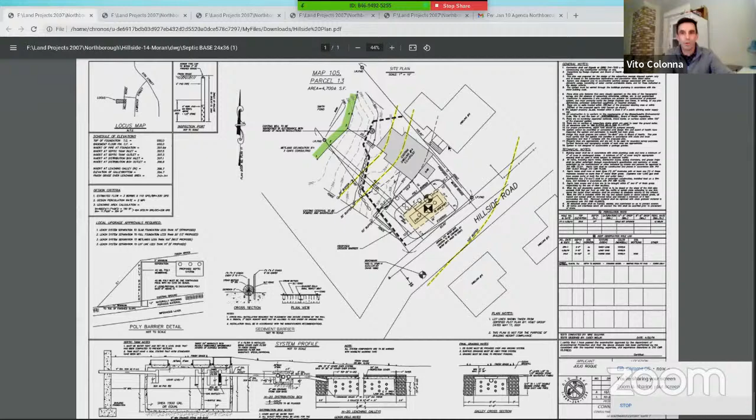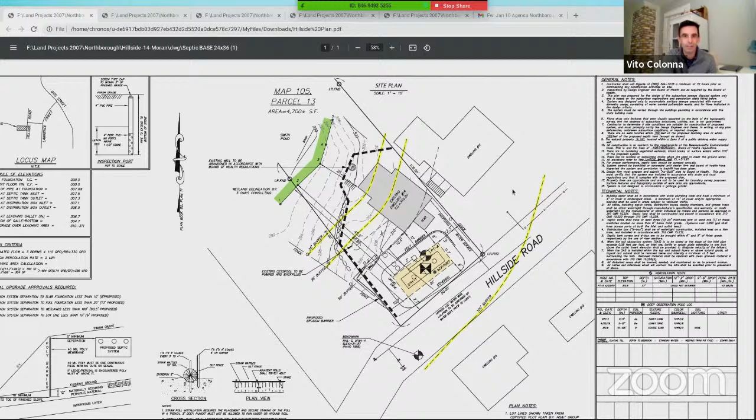So we're over at 14 Hillside. It's a pretty small piece of property, 4,700 square feet, and it's right on Smith Pond to the rear. So right now there's an existing house kind of in the middle, Smith Pond to the rear, and then the 100-foot buffer zone is all the way out to Hillside. So the entire site's inside the buffer zone. It is a challenging site with the slope coming down the back.

So there were a couple components to this one. The first one was they want to replace the septic system. Right now there's an existing cesspool located off to the side of the house, and that's in failure, so it has to be replaced. We proposed to put a septic right up in the front, just about as far as we could get it away from the wetland. It's about 60 feet from the edge of wetlands, but it is basically as far as we could push that away. So it is an improvement, providing more separation from both groundwater and horizontally to the wetlands.

And then along with that, they also have a new water service coming in on the side, pushed to the side to avoid the septic system. And then also looking to abandon the well out in the back over there. Another part of the project that came in after we filed - we amended the plans to show this - but the owner had a structural consultant look at the foundation, and there are repairs and replacement of the foundation that's needed. So we pulled the erosion barrier out and around to give as much space as we can. It is difficult access back here, but they do need to do foundation work on that.

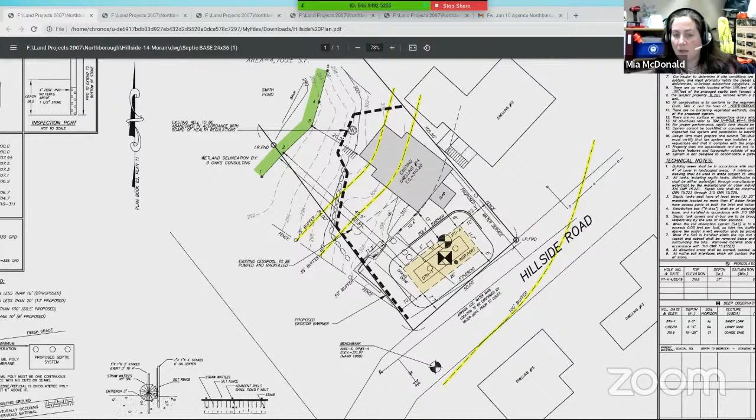And just to note in the minutes, and I don't think it's redundant to put a special condition in, that this really doesn't include any landscaping. The backyard's a bit wild, and it wasn't this owner, it was a previous owner, was back there cutting vegetation, and I called and had to ask them to stop. They said they were cleaning it, and I said you can't just cut trees down there without a permit. So just to really note for the record that the erosion control line is the limit of work, and any work beyond that would need a new notice of intent, because the area has renaturalized fully.

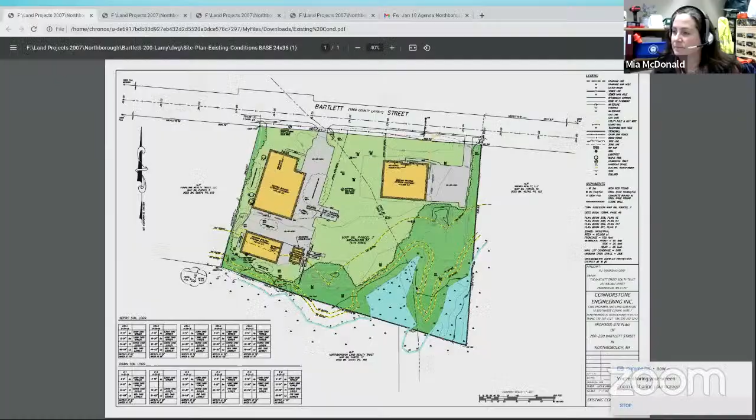So we are at 200 Bartlett Street. It's a 6.7 acre parcel, currently developed with basically 3 primary buildings and then there's 2 outbuildings - these 3 shown here, and there's a building right here, it's a garage, and then another garage down here. This building in the rear is Lamy's Automotive, you're probably familiar with that. And then these front two buildings are currently unoccupied.

Out in the rear, there are some bordering vegetated wetlands going along - there's this blue line in the back. They extend up into the site and then cover the corner over in here. And the 100-foot buffer zone, this yellow line, extends up into the rear portion of the site.

Overall the site's fairly developed, it's been worked over the years. Even this area in the back, it's more of a field with some overgrown scrub, but you can tell it's been developed - there's some spoil piles in the back here, there's been excavation in the past all out in here. The only areas that really haven't been touched are basically right up tight to the wetlands. The rest of the areas over time has been developed and worked over the years.

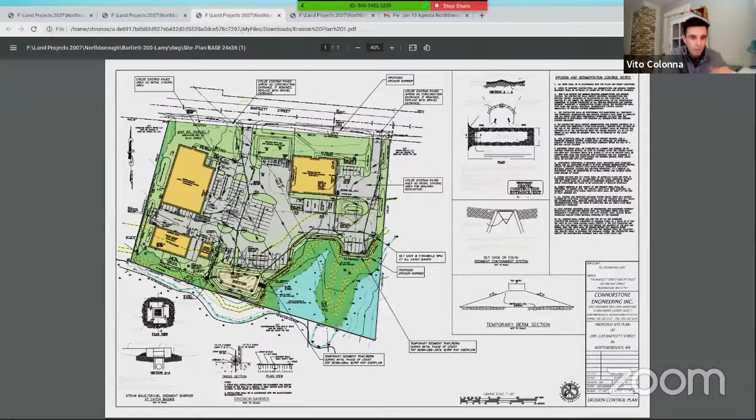During construction, we have an erosion control plan. It may be a little difficult to tell with the colors here, but essentially what we're doing is providing a berm to create a temporary basin around the back there, and another one around here. Early on in construction, we'd put in the erosion controls around the edge, and then construct this small berm to contain everything from the work area on site. It's a fairly simple system, but it would be effective and contain everything on site without letting it get to the wetlands during construction.

All right, I think that was my brief overview. I know Mia did have some comments, and we submitted updated plans. I don't know if you've had a chance to look at them yet, but we addressed Mia's comments. I don't know if there's any particular ones you want to go through, but we provided also the LSP report on the previous contamination and ongoing monitoring that's out there. I can let Paula go through that ongoing monitoring that's part of the site right now.

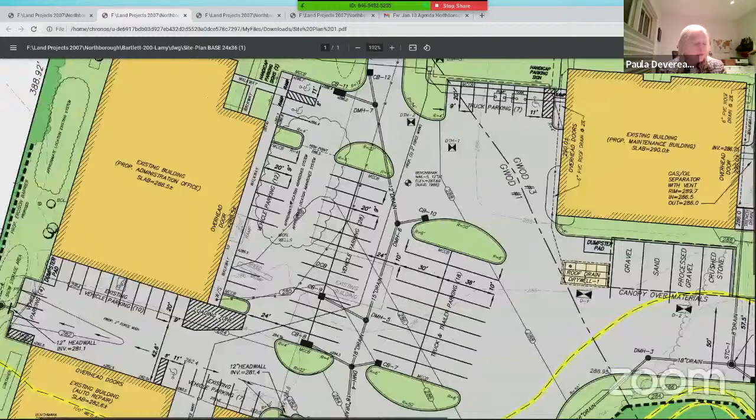Sure. So as Vito indicated, there was an area that had some contamination because a circuit manufacturing company was located here in the late 1980s. There were some volatile chemicals that were detected in a leaching field. The owner had some work done from September 2002 through 2009 to treat the contaminants. The problem is that this is in a groundwater protection area.

As an aside, I want to let you know that we did go to the Zoning Board of Appeals for the maintenance facility in the building as you're looking at it right now to the right.

But anyway, to get back to the contamination, because it was in a groundwater area, the seller and the LSP for the seller were told by DEP that because the Lyman Street well, the water well, had been discontinued, and because this was an industrial area, it didn't have to be cleaned up to drinking water standards. That has since been proven not to be true. DEP does, because it's in a groundwater protection area under local zoning, now require that even if a well isn't being utilized, the property be cleaned up to drinking water standards.

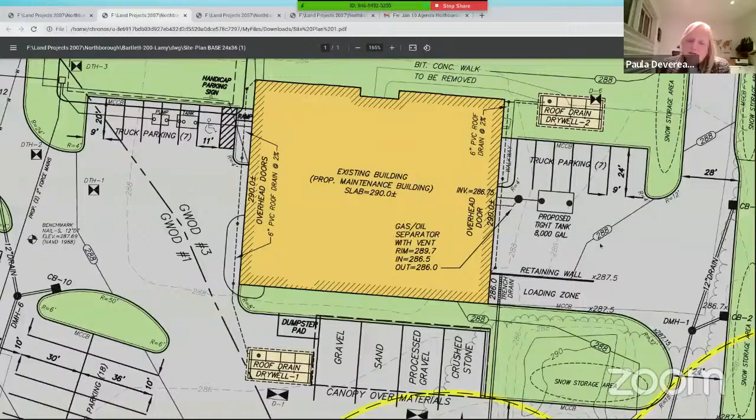You've got ZBA approval. You're just waiting to get in front of the planning board. Correct.

One question I have: most of this is outside of the well, and certainly there's not a lot inside the buffer zone, but the equipment parking on the right-hand side, and the parking on the left-hand side which has a Stormceptor — do we have any exposure there? We're close to the wetlands, right? What about potential leakage, dripping oil or brake fluid or something from vehicles parked there?

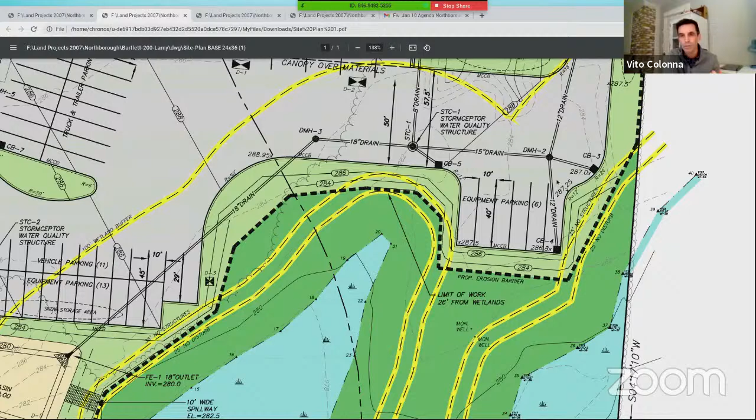Yeah, so that was one of the reasons we use the Stormceptors — they separate out the oils and floatables better than some of the other structural treatment systems. So everything from this area would have curbing around the edges, and everything would get into these deep sump catch basins, which also have hoods on them. Then it would go through the Stormceptor. Okay, good.

So we have one on that system, and then one over here too, and one over here. We also have two more, one on each side of the Lamy Automotive building — there's one over here and one over here. Okay.

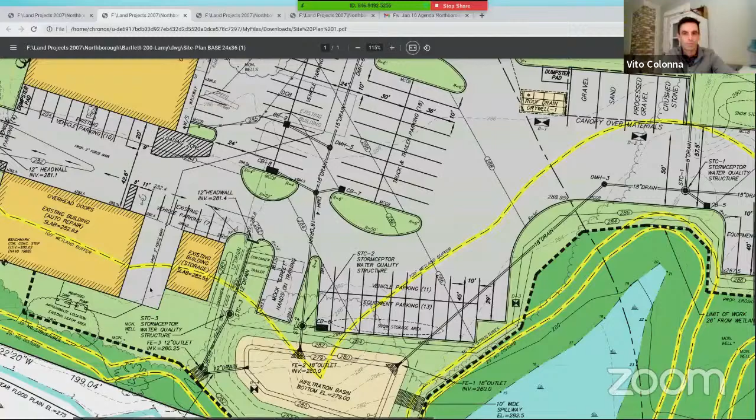Any questions from the commission? Comments, concerns?

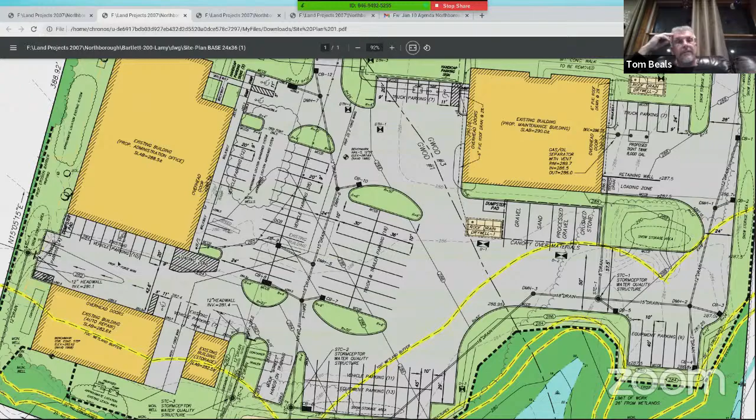I just have a quick comment regarding the roof drains on those two buildings where you have pre-existing groundwater contamination. You really don't want to put an additional water source in there, because that's going to make it migrate further away. So you might need a reinjection gallery outside of the contamination zone for those roof drains. That's why I didn't want to just jump on it and add that in right away — I want to check with the LSP to see where they'd recommend it, and what type of device they'd like to see. It might be something small that lets a little bit in, or if we do full infiltration, it gets pushed up to the front or something like that.

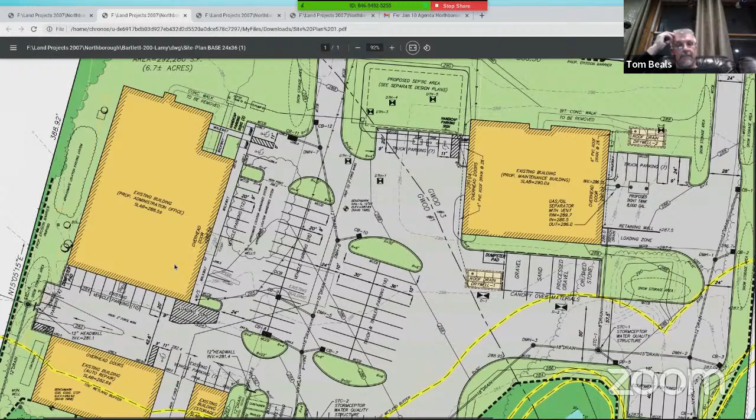I'd like to take a deeper look at it before we just put something there. Groundwater flow is most likely to the wetlands, so go with the direction of the LSP. Sometimes you want to put it either downgradient or upgradient, depending what they want to do. We'll have to discuss with them and see what they recommend. Overall, everything else I'm happy with.

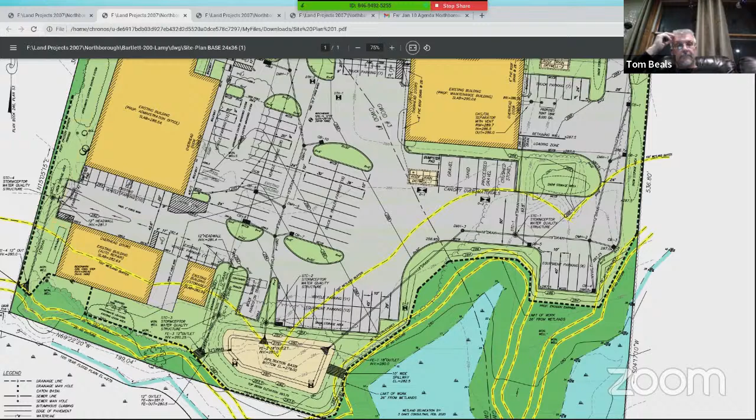Any more questions or comments from the commission? It sounds like we're going to continue this because of the roof drainage open item.

It's definitely an overall improvement to existing conditions. It would be nice to see recharge of the roof, because in the area between Lamy and the administration building we want to reduce flooding there. There is flooding there right now, so it would be nice to not have flooding, especially now that we know the contamination is ongoing. You could continue it until you get more information. The contamination area is really outside of our scope, right? That's between DEP and the applicant. Different department, yep.

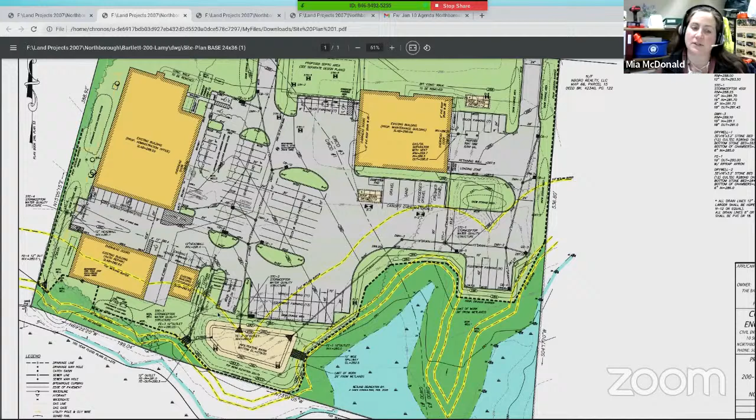DEP's comment came back to confirm that the stream was intermittent. I had run stream stats on the site of the intermittent stream in the back and got the same calculation, that the watershed area was too small, determining the stream to be intermittent. But the comment from DEP came back - I'll read it so we say we addressed it: Mass DEP recommends the applicant provide the remaining 3 days of observation needed to overturn the USGS perennial stream designation, in keeping with the regulations, or a copy of a valid permit confirming the intermittent status.

So they wanted 3 days of observation or a copy of a valid permit. As Vito pointed out in one of his comments, we do have a downstream determination from 1 and 29 Lyman Street. Long story short, that ORAD is still valid and did determine the downstream area was intermittent, and the downstream area has an even larger watershed. So if that is intermittent, this is intermittent.

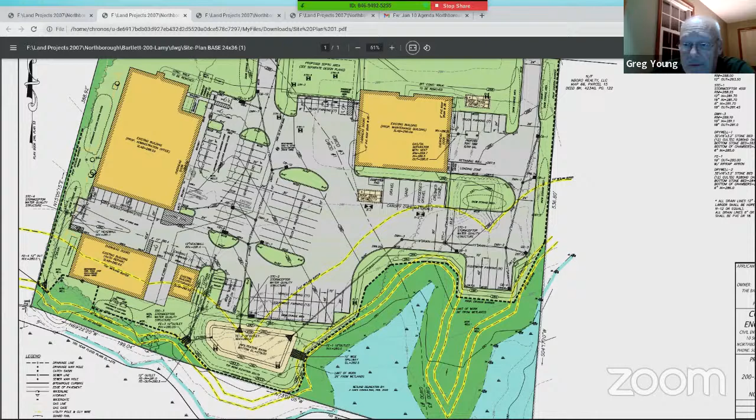Good, thank you. Unless anybody has an objection, I think we should continue this until next month, when Vito can come back with some discussion of the roof drain options or the way they're going to go. It's a fairly significant item. Any disagreement there? Nope. Okay, then we need a motion.

Could I ask the commission to discuss special conditions they would like to see, because I won't be here next month, so I could get them listed and draft the order, so whoever is taking over for me would find it easier to issue the order.

I would like to suggest permanent markers. Permanent markers, you mean the wetland markers? Yep, the signs along the rear, on the back side of the property? Yeah, we'll say about every 50 feet, with approval.

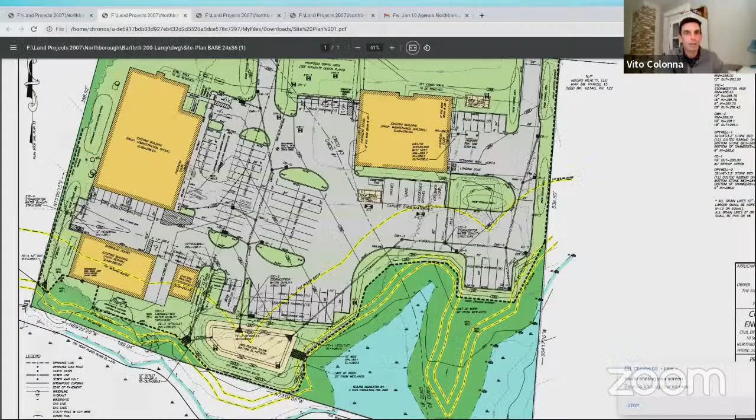If there's anything else - any other special conditions you can think of, Vito? I can't remember if I saw it, but was there a track pad shown on the plans for the trucks heading back onto Bartlett?

We showed the detail with just a call out. Right now we're going to use the existing driveway coming in, and then once it's taken out, put in the tracking pad. We just said replace, we didn't draw it - we just said to replace with the gravel entrance after. Okay. But initially, at least they can use the existing driveways, which is nice.

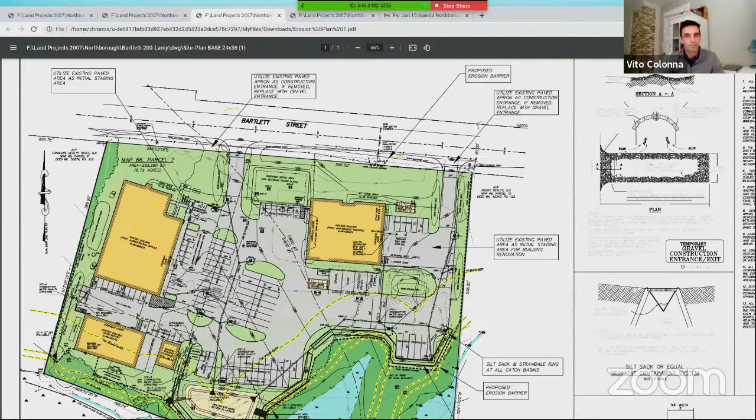I just know with those, when they start digging around once they get in the back, it tends to even pick up onto the driveway, and then we end up with it on the street pretty quick. So maybe that's something that can get monitored while the SWPPP is getting looked at too. We can add weekly street sweeping and as-needed cleaning. Just friendly advice, keep the street clean - we do get a lot of calls from that part of town.

A motion to continue. Dan, you were starting that, I think. Okay, maybe not, maybe it wasn't Dan. I thought it was, I don't think it was me, but I can do it. A motion to continue 200 Bartlett Street to the February meeting.

Is there a second? Second, seconded by Kelly. Roll call. Tom Beals, yes. Dan Clark, yes. Justin Dufresne, yes. Kelly Marston, yes. And I vote yes.

So continue to February, Vito, and the primary focus will be the roof drainage option discussion. All right, sounds good. Thank you very much. Very good, thanks folks.

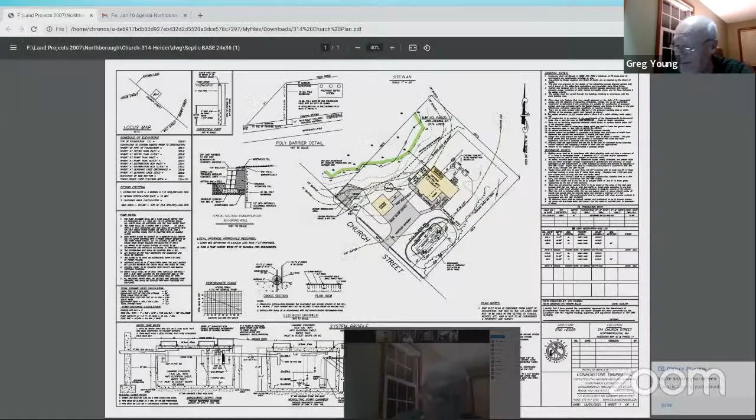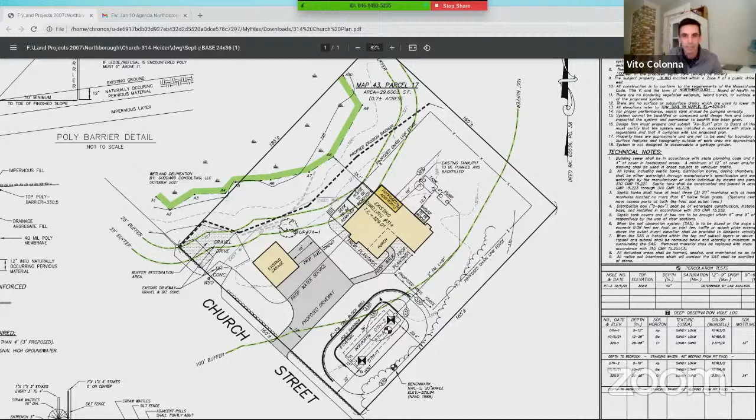So this one is an existing house over on Church Street. It's 0.7 acres. Right now it was kind of overgrown, it's been left for a while. But Eric recently bought it and they're looking to fix it up, renovate the existing house, and improve the overall site. Right now there is a BVW on the west side of the lot, shown in green, with the 100-foot buffer extending out for a majority of the site, not quite all of it, but a lot of the site is inside that buffer.

So right now, the existing site has a garage up front. There's an existing driveway that comes in a little U-shape in this corner, and then the existing house is back here. The existing portion is this lighter color, and there's a little appendage off the back, and a deck right over there. So right now, the existing house is just outside the 35 foot, it's basically right on that line, more than 35 feet from the wetland there.

There was some work done on the site early on, just some cleanup work basically. I don't remember if it was an actual enforcement order or just a notification. And after that, they did put up straw wattles and kind of stopped doing that cleanup work. It was more just cleaning up around the house. They had cleaned some vegetation out down in here too.

So now that they've got us on board, we did a septic design and also a design of the overall site. What they're looking to do is, first off, replace the septic system. There's an existing cesspool out the back, it's within the groundwater table, well within it. So we're going to move that septic out as far as we can. On this one, we did have the opportunity to get outside the 100-foot buffer.

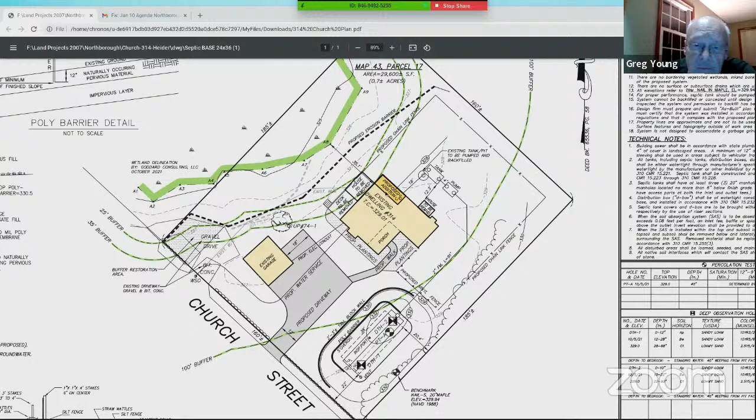So Vito, on what is inside the 35, what's inside the no-build 35-foot buffer right now? There's the chain link fence, and there's that piece of the house in there now that they're gonna take off, and the deck they're gonna take off. The proposed would be this fence right in here.

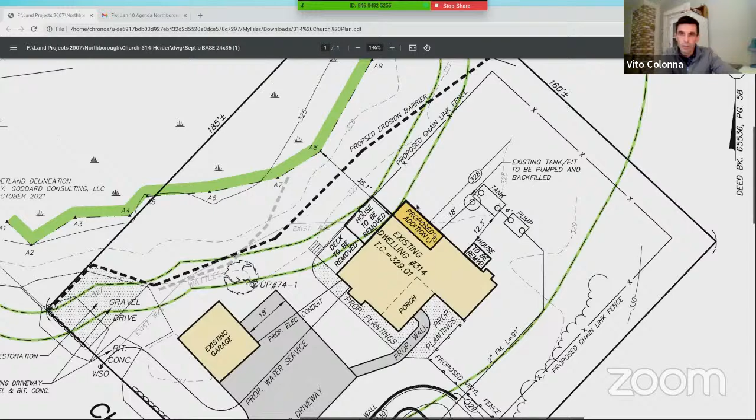I'm just trying to see what would happen if you pulled that fence out of the 35 altogether, maybe ran it off the corner of the house - you'd have to pull it back over into here. Or even angle it along the 35, if you want to make that corner, you can do that too. That's an option. We have to go over that with Eric to see if that would still work with their plan.

Eric, I don't know if that's something that would work with what you're looking at. Yeah, I have no issues pushing it to match that 35 line. You just go right off the corner there, Eric. And then you could actually angle it down the existing corner down there if you wanted to, or that's fine too - I have no problem moving it there if that makes a lot more sense for you guys.

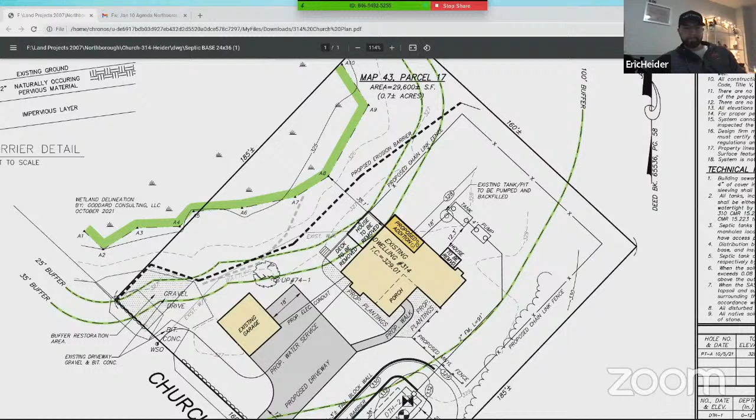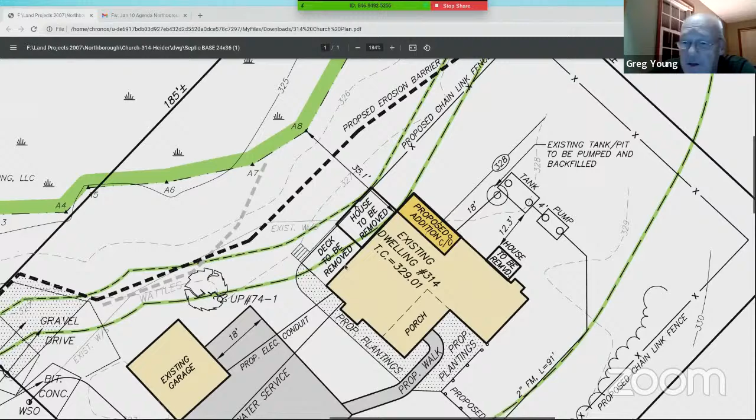We have no build within the 35, and a fence counts as a structure. So if we move that, then we'll have nothing in the 35, so that's good - move these two out of there, but we do still like the restoration area, Vito. Yep.

Mia, comments you have? No, I just wanted to get the existing tree line on there so that we had it for the records, because you can see the property line is over in the wetlands, and sometimes people move in and start to expand the backyard into the wetlands. And then I did want more detail on the buffer restoration area so that it wasn't just loam and seeded and then they park on it later.

But I do think those can be approved administratively if you'd like. I'm comfortable approving the revised plans and the buffer restoration area administratively. Any questions from the commission? Comments, concerns?

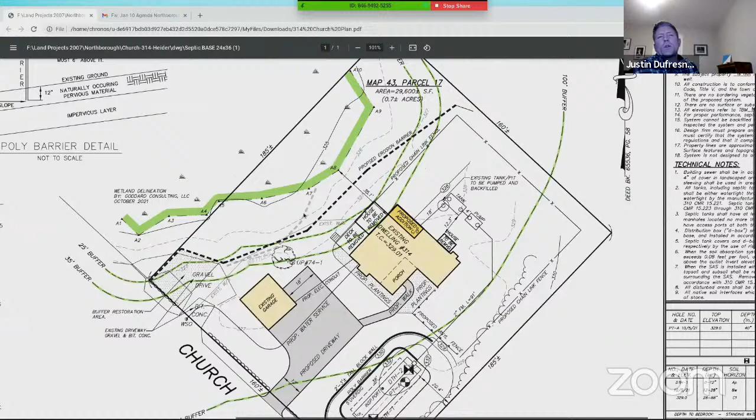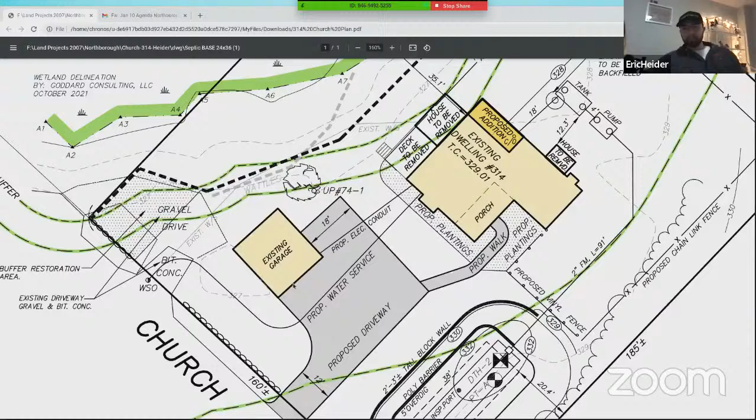Don't hear anything, take a look at the public comments. Just one quick one on the existing garage - since it's accessed from the other side today, would that access just be flipped? Are you looking to reside it or change it? Yeah, the existing garage doors would basically just flip flop to the other side, so it makes more sense. You're keeping the same structure, just flipping the doors, re-siding, new roof, and a door and two windows.

Regarding the existing water service, I see you're putting a new service into the building - the other one just gets abandoned in place? Yeah, you just abandon it right there. We figured we'd pull it out, if we're gonna put a new one in, we'd pull it out away from the wet area in case you ever have to work on it in the future.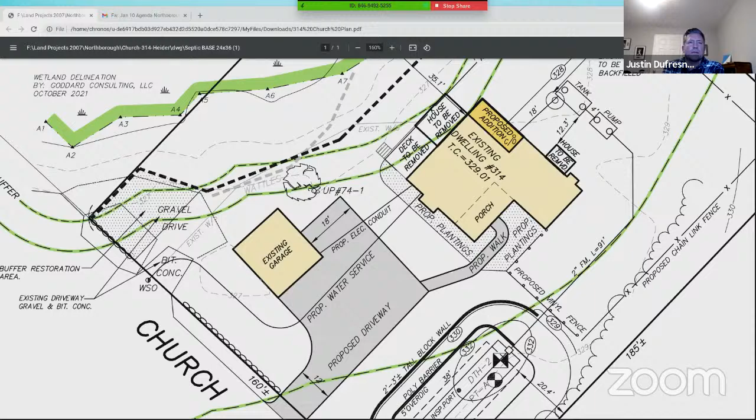Yeah, I think it looks good. Anybody else? I don't see any hands up - looks like an overall improvement. I don't see any public comment.

We could close this tonight, I think, as long as we get the comments on the more detail in the restoration area and the tree line. I agree, any objections from the commission for moving ahead with those? You want to wait and push it to February? I don't think we have to move it, but that's my personal opinion. It's pretty straightforward. Nodding heads, I'm fine with it.

Let's go ahead - Mia, how are we going to word that on the order? We can condition that we receive revised plans showing the tree line and a detail for the restoration plan approved by Conservation Commission or their staff. And we should also consider some permanent markers along the edge.

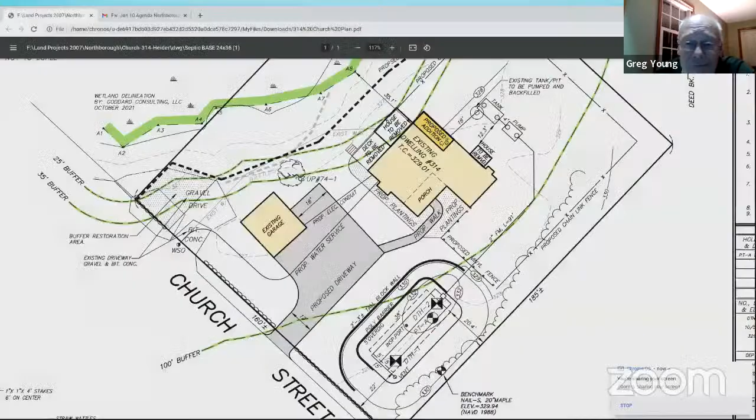We're really doing a lot of markers tonight here. I gotta sell some signs. No, I'm just kidding, I only have like two left.

Where are we thinking there? Nothing in the back, probably along the side - just one or two along the side. I wouldn't think any more than a couple, maybe even just one. There's a lot of trees there, so just one on a tree, unless they prefer a different barrier - if they prefer a boulder or a line of bushes, the sign's pretty inexpensive and simple.

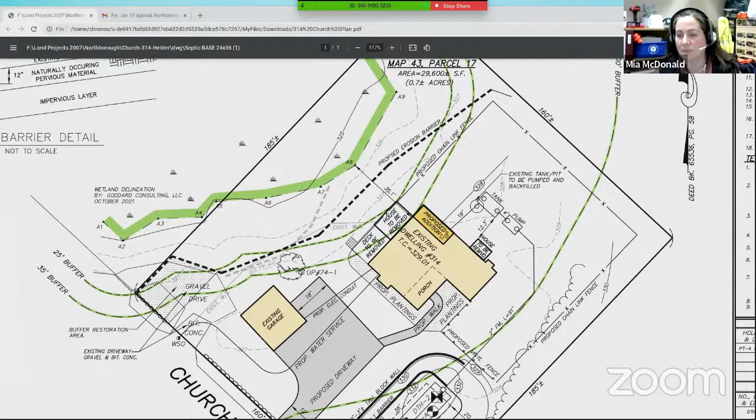I think two signs would be appropriate, one in back of the garage and one out in back of the fence - kind of one out here and one over here. That would do, a lot less expensive than putting in shrubbery.

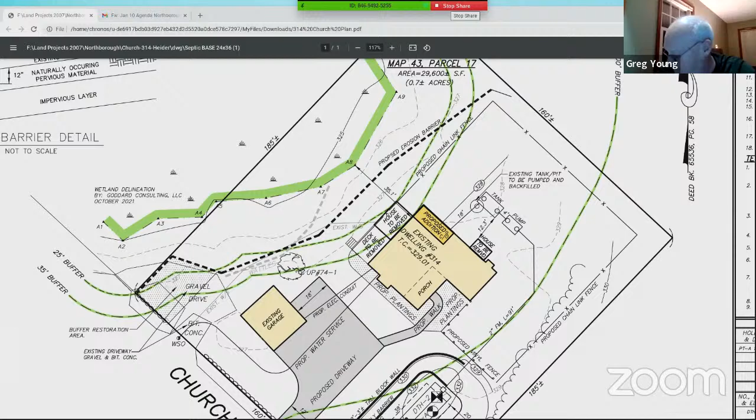So a couple of signs and receipt of the detail around the restoration plan and tree line delineation, prior to commencement of work, right? Yes, okay.

Then if we all agree, let's move ahead to close the hearing. Make a motion to close the hearing on 314 Church Street. Seconded by Kelly. Roll call: Tom Beals, yes. Dan Clark, yes. Justin Dufresne, yes. Todd Helwig, yes. Kelly Marston, yes. I vote yes.

Make a motion that we issue our order of conditions for 314 Church Street with the previous conditions we discussed. Seconded by Dan. Roll call: Tom Beals, yes. Dan Clark, yes. Justin Dufresne, yes. Todd Helwig, yes. Kelly Marston, yes. I vote yes.

All right, well thank you. You're off and running, Eric. Thank you, Vito. Thank you, guys, thank you very much for working with us, good luck. I appreciate it, thank you. All right, have a nice night. Oh, and just for the record, it was a violation letter, not an enforcement order, so it doesn't need to be closed out. Okay, no. Thank you, guys, have a good night. All right, you too. Okay, thanks Vito. All right, thanks guys, good night.